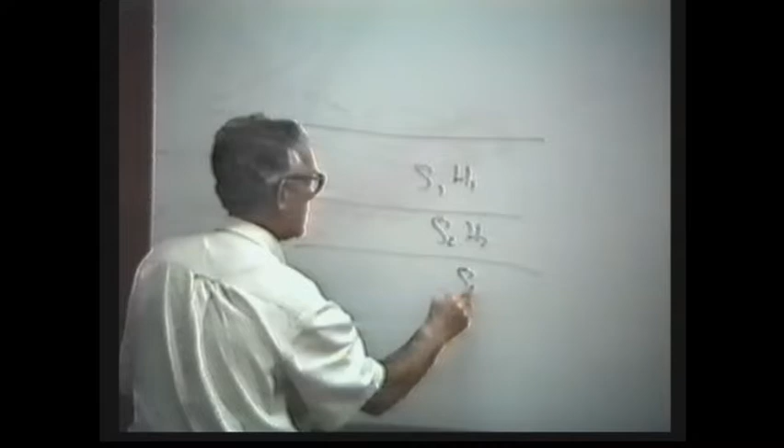Couple more comments. When we perform soundings, rho 1, H1, rho 2, H2, rho 3, there is inhomogeneity,

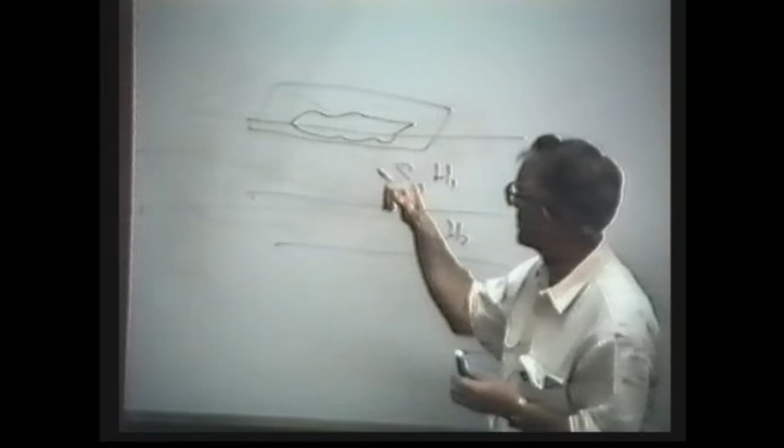At early stage, this inhomogeneity has influence, no doubt, it distorts the apparent resistivity curve, no doubt. However, with increasing time, due to the fact that it's a diffusion process, there are no currents here, so starting from a certain moment, the influence of the upper section disappears.

If you remember, we discussed it: if we have a two-layer medium, rho 1, rho 2, there is a moment when the upper layer becomes transparent. What does it mean transparent? The influence of induced currents becomes very, very small. So it doesn't matter if it's a uniform layer or not uniform layer, the results remain, unlike other methods, the same.

So the influence of near-surface geological noise decreases with increase of time. It's used also. Now, that's the second comment.

I think this is the last comment about time domain, and then I will go to a completely different, we'll start to discuss a completely different subject. Oh no, two more comments, I look at the table, two more comments.

Let us take a typical model in mining prospecting: a conductor and overburden, and a high resistive host rock. It's not necessary, but let us do this case. We perform measurements.

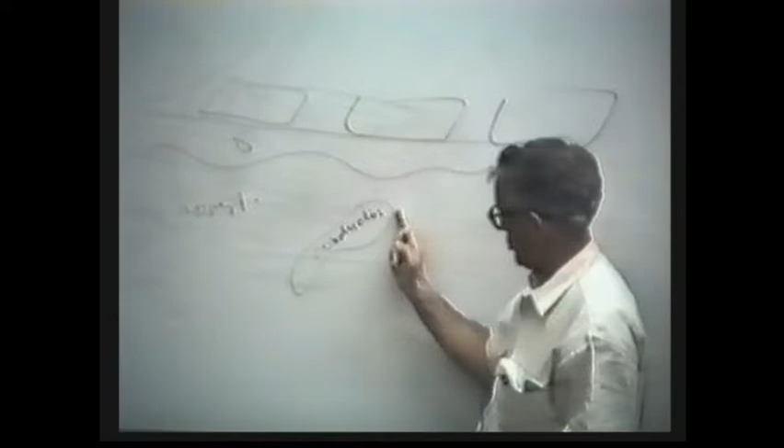What do we measure? We measure the effect due to overburden, and we measure the effect due to conductor. Our goal is to approach the late stage when the conductor manifests itself in the best way.

Also, with exponential decay, we can define a time constant. In most practical cases, not always, at that moment the field due to overburden also corresponds to late stage. So we don't know the conductance, we don't know the overburden, we don't know its thickness, we don't know how it changes.

It's a source of noise. But what we do know, often, not always, is that the field which we measure, or electromotive force, is some effect due to our body plus effect due to noise, due to overburden. Again, we don't know conductance, thickness, or conductivity, but we know we are approaching the late stage. Therefore there is some coefficient A which depends on conductance and on geometry, divided by T cubed.

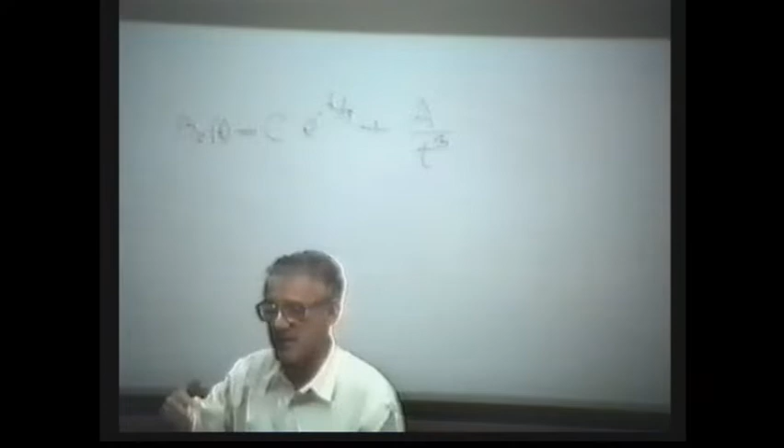That's what we do know. We know, regardless of what is the thickness or conductivity, as soon as it's late stage, the field must decay in this way.

I saw reasonably many examples in Russia, where performing measurements at two times. Let us take these measurements at time T1 and sometimes T2. It's equal to C, E minus T2 over tau, plus A over T2 cubed.

Let us take another measurement. We have them when we measure transient response. Again, we don't know this coefficient. It's noise. But we know how it behaves with time in most cases.

So if you multiply this term by T2 cubed, T1 cubed, it takes the difference, not difference of values of the field, but before, please multiply this coefficient. What would happen here? A difference between T2 cubed...

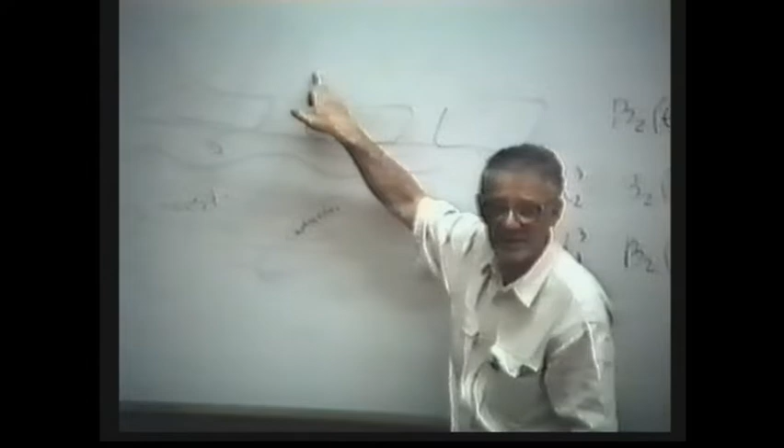Often we have, again, a function we don't know. It's unknown, it changes from point to point. Here, one value A, another value B. But what is important is that we do know the dependence on time. It's not constant, it's a function of the point of observation. It depends on the size of the loop. It depends on many, many factors.

But there is one important factor: regardless of what the overburden is, there is always a moment when the field, the magnetic field derivative, will decay in this way. So combining our information about the behavior of the field due to conductor and layered medium, we can subtract, we can reduce, sometimes even greatly reduce, noise. So that's one of the ways of working with this data in order to remove noise.

That's one example. It's natural if there is no overburden, but there is host rock. Simply, we also know, suppose no overburden, but there is a finite resistivity of host rock. Then you will know the field is equal to, again, some unknown useful signal, plus, again, an unknown different constant, not the same, only the letter the same, T to the power of 3 over 2.

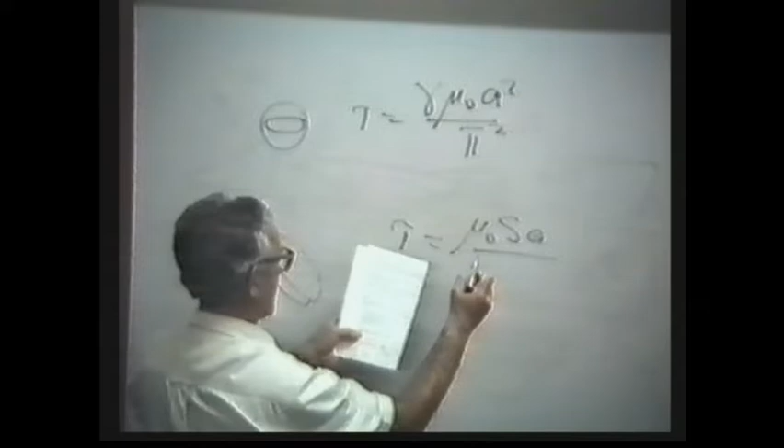Then let me show you what happens with a disk. Sometimes we can replace our body by a metric thin disk. If its conductance is S, meaning thickness times conductivity, then the time constant equals mu naught times S times A, divided by 5.5. What is A? The radius.

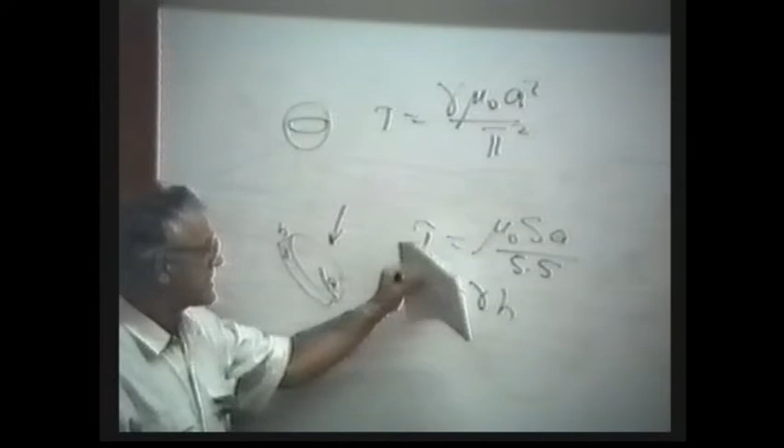Conductance is S gamma times thickness. So the time constant is governed by conductance and the radius, or size, in the direction perpendicular to the field. Why do I say perpendicular to the field? This time constant is independent of how the field is directed. But mentally, your primary field can be presented as a field along the disk and perpendicular to it.

If you consider the field along the disk, since it's very thin, it does not practically create any induced currents. So you can say the time constant equals mu naught S A divided by 5.5. Let me give you another example.

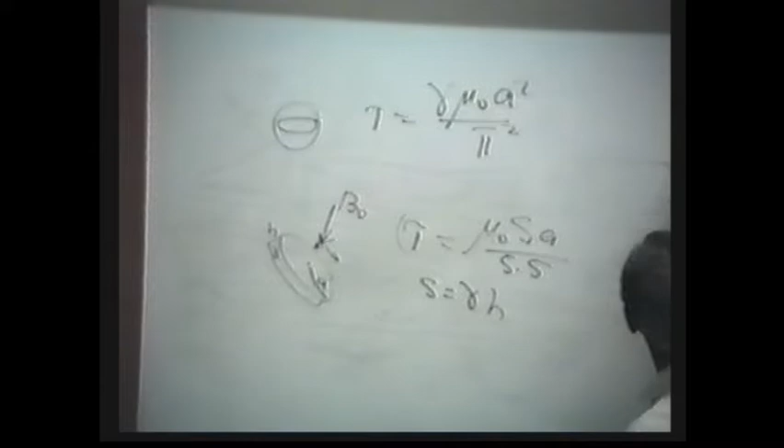Suppose we have a cylinder, a very long cylinder. It doesn't matter how the field is directed, the constant equals mu naught gamma A squared divided by, let's say 6, more precisely 5.78, but 6. Now you see how everything was 10, 6, 6. So there is no strong change. We only have to know which parameters define it.

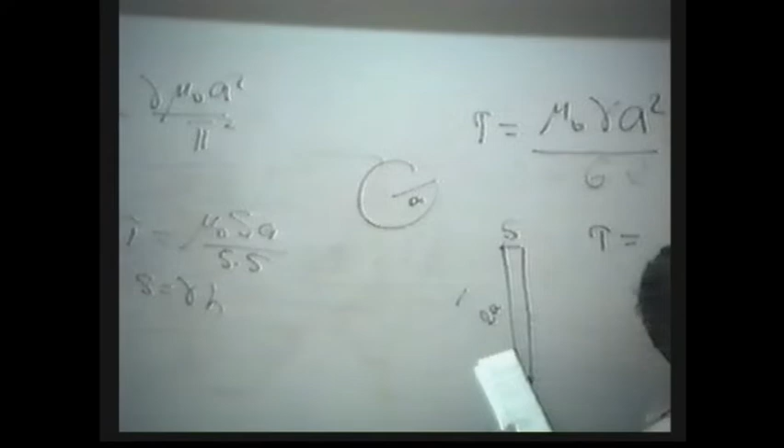Let me give you another example: a plate. Conductance S, again thickness times conductivity, very very long. Now that's 2A. The conductance, divided by 4, when thickness H is much smaller than this dimension.

Now let us look at another example. Suppose I have a thin plate, but the cross-section changes to an elliptical cross-section. That's B, that's A.

Suppose the field has an arbitrary direction, but not along the axis. So there is always a component of magnetic field in the perpendicular direction. Then the time constant equals mu naught S A divided by 5.5.

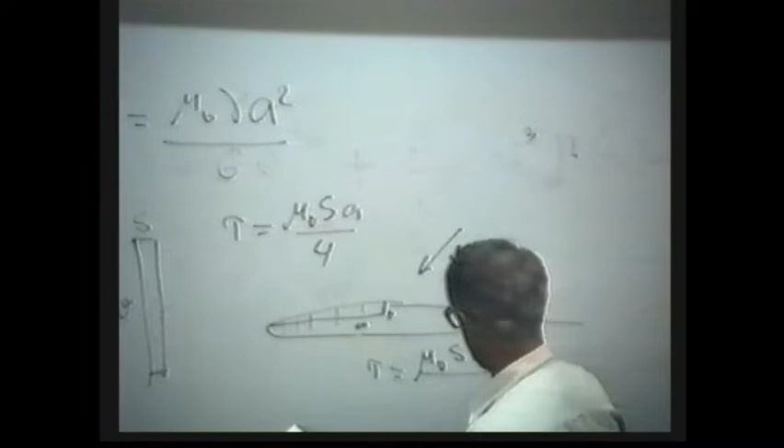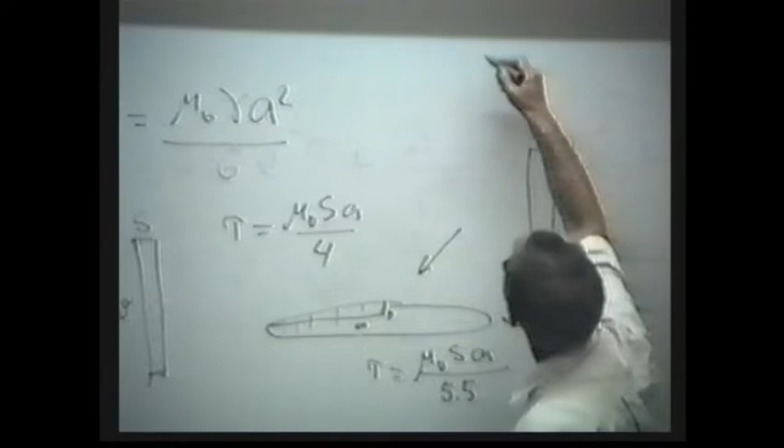Now suppose a very unpleasant case: our elliptical cylinder is vertical and our primary field is down. Let us assume we created the field this way. Our loop is located above a vertical dike, at the dike. What do you think happens in this case with the time constant?

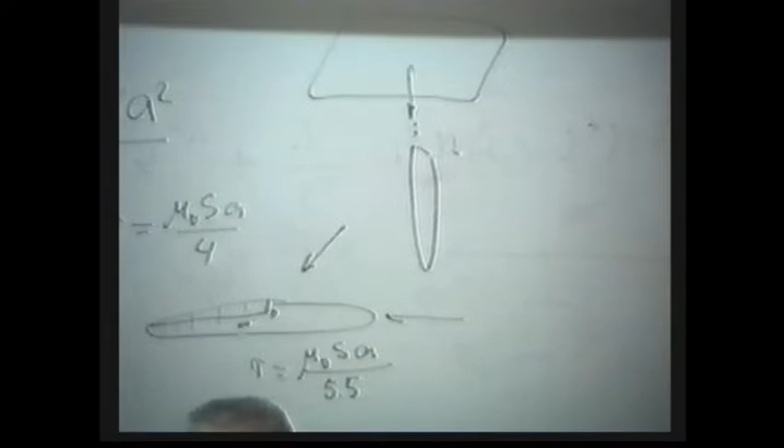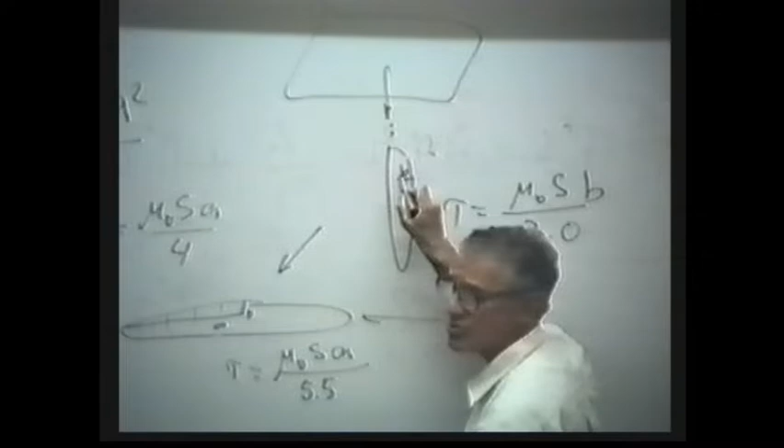Will it be large or small? Very small, very small. The time constant is then equal to mu naught S B divided by 3, where B is half the thickness. So two troubles instantly: trouble number one, the field is going in this direction and the cross-section is small. We do have induced currents, but they are small. Moreover, the time constant is extremely small, so decay would happen quickly.

In general, the time constant is independent of how the body is oriented, but that's an extreme case when the field is exactly along the major axis. Now let me take another conductor, and I will fill in this part. It will be done.

Suppose we have a spheroid with axis B, axis A, and conductivity gamma. What happens to the time constant when the ratio between A and B changes?

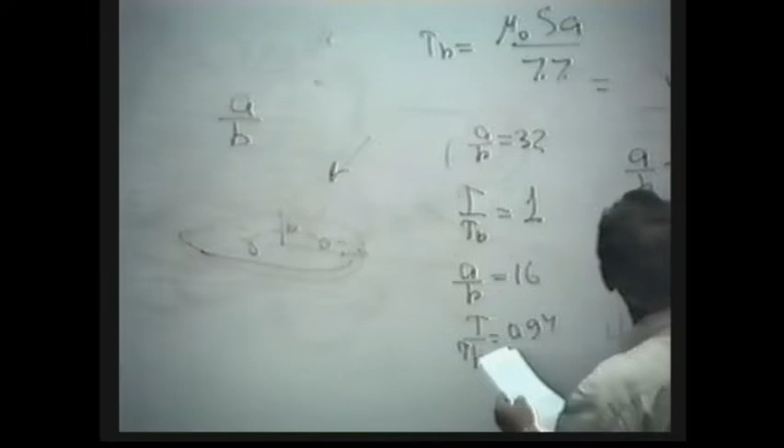Now if we take A over B at 8 meters to 1 meter, then tau over tau B is around 0.884. So again, a small difference. All these spheroids behave as if you had a very thin body.

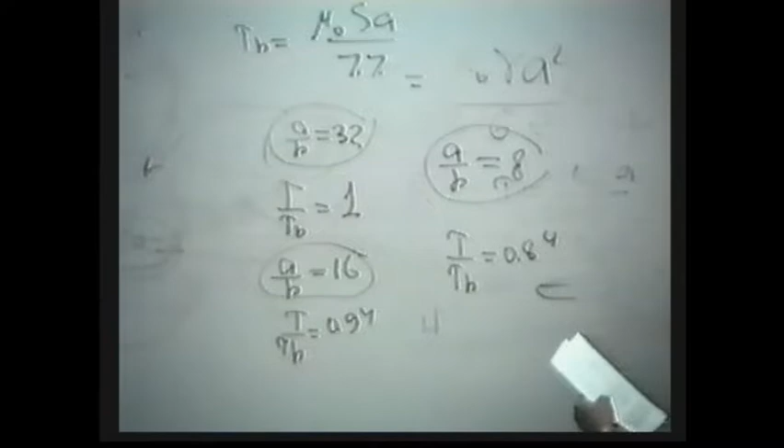Now let us take the ratio A over B as 4. Again, tau over tau B equals 0.7 — not a great difference. And finally, when you take A over B as 2, it becomes tau over tau B equal to 0.56, only a 2 times decrease, so it's a very stable parameter.

Now I've given you a thin conducting plate of finite dimension, so let me stop here. That's the general picture — that's all about time domain, taking into account what was told before.

Now let me discuss with you a completely different subject. It has a straightforward relation to the relation between geological noise and useful signal.

As I told you, I am looking at the past, at the process of improvement of electrical methods. So up to the 1950s, there was only the electrical method for soundings, for mining prospecting, not in conditions like the Canadian shelf or Scandinavian, but in environments where we have overburden and host rock.

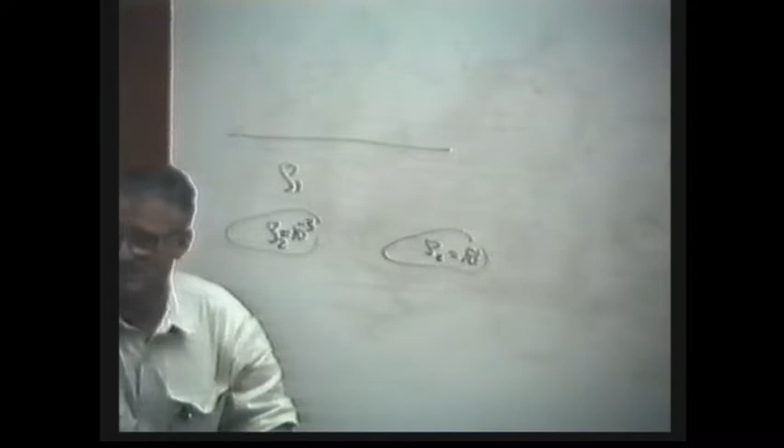There were two known facts about electrical methods. Fact number one: if I have two conductors that greatly differ by resistivity, the anomalies are practically the same. So if rho 1 is 100 ohm-meters and rho 2 is 10, the anomaly is almost the same. So, poor resolution.

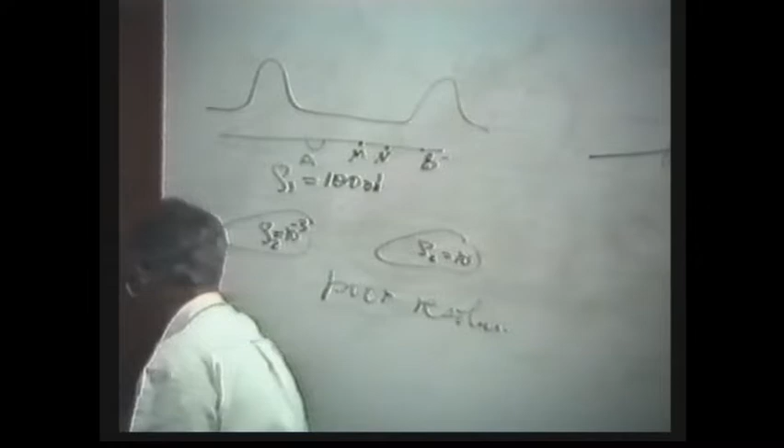Then there was a second fact, which I haven't mentioned yet. There is almost an iron rule, almost, when you use different profiling systems, not electromagnetic, but A, M, N, and B electrode arrays.

If we have a conducting overburden with thickness H, and we have an ore body like a dike with thickness h small, and we use our array AMNB, then the rule of thumb is: regardless of the conductivity of the dike, and regardless of the conductivity of the overburden, as soon as it's less than the resistivity of the host rock, you cannot detect your conductor if the overburden thickness is more than 4 to 6 times the thickness of this dike. So it's a very serious limitation, extremely serious.

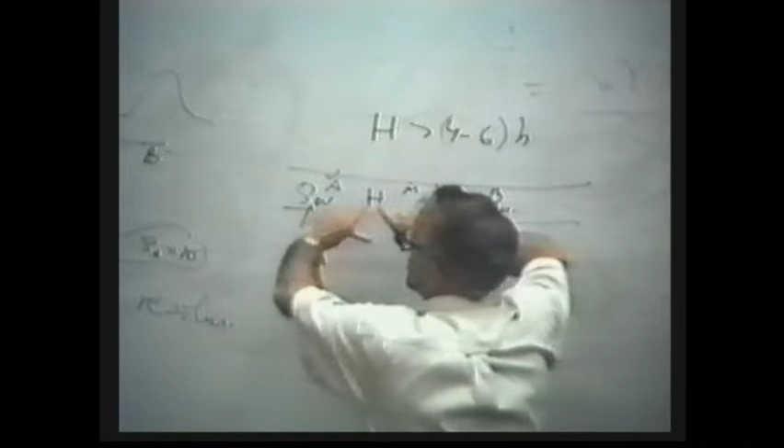You can make your separation AB as far as you would like, it's no use. For instance, you can use a dipole system: AB here, MN here, generator here, and you measure voltage. It's also a profile system. You can fix the position of AB and move MN, but it will not help.

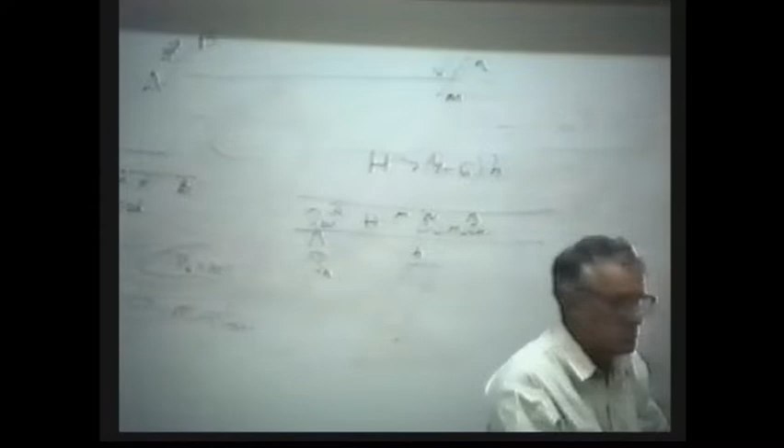Why? First of all, solution of the forward problem and experience both show this. What is important is: yes, if you make a large separation, you can create currents here, no doubt, there will be currents, charges, electrical arrays. But if there is an overburden, these charges induce other charges at the interfaces, and they usually screen the effect. So if you have a dike with thickness only 3-4 meters at depth 20 meters, don't expect to see it, regardless of how huge your separation is.

So these two facts were known. Then when inductive methods began to be used in a conducting environment — non-conducting environments were used before the Second War — Sweden developed excellent Slingram systems, as did the Canadians. So there was a lot of equipment, but in the West there was no experience in conducting environments. There were sufficient places for working in resistive, very favorable conditions.

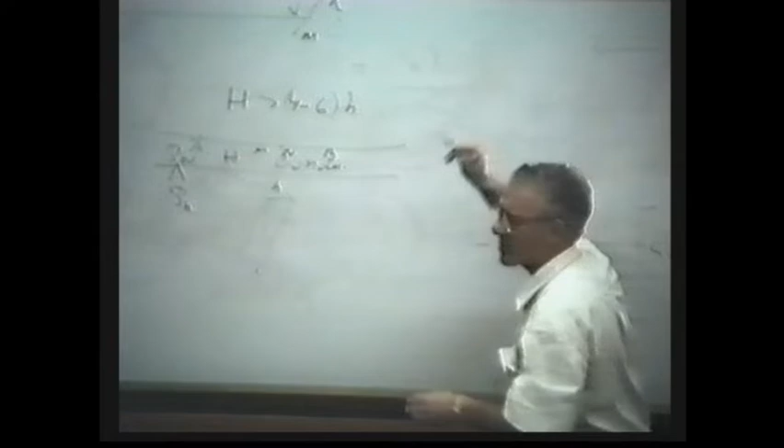But when attempts were made to use inductive methods, loop methods for instance, in a conducting medium, it turned out it's possible to detect deeper, unlike electrical methods. So it was a very good period of time. First of all, if you remember, measuring the quadrature component at the low frequency part of the spectrum.

What is the ratio between tau noise and tau ore body? If you are working at the low frequency part of the spectrum, your magnetic field is proportional to tau, so you have better resolution. If you are working measuring the in-phase component, the ratio is even better. So it was an excellent, short but excellent period — I would call it the optimistic period of inductive methods.

I remember the time, I remember the papers, I remember many other things, and finally we developed a method which has higher resolution than DC methods. So it was the driving force in developing inductive methods. I'm talking only about frequency domain now, then time domain.

But evil didn't sleep. And we didn't notice that sometimes, in spite of the fact that there was no more grounded line, there is still a different source of fields which is much less related to the conductivity of our body than we expected. That's what I'm going to discuss with you — what I mentioned, Duncan mentioned, and then I will discuss this subject in more detail. So let us do the following.

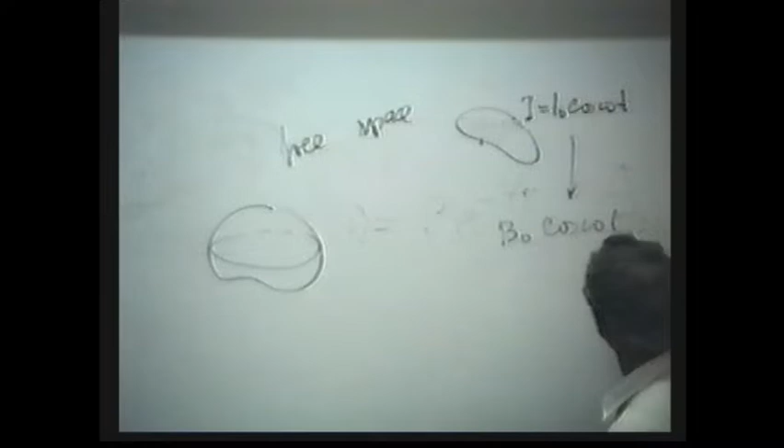We have conductor, free space, and our loop. Our current changes as I cosine omega t. This current creates what? Primary magnetic field, cosine omega t. This magnetic field creates what? Primary electrical field. That's the main role in frequency domain, and in time domain during ramp time, it creates primary electrical field.

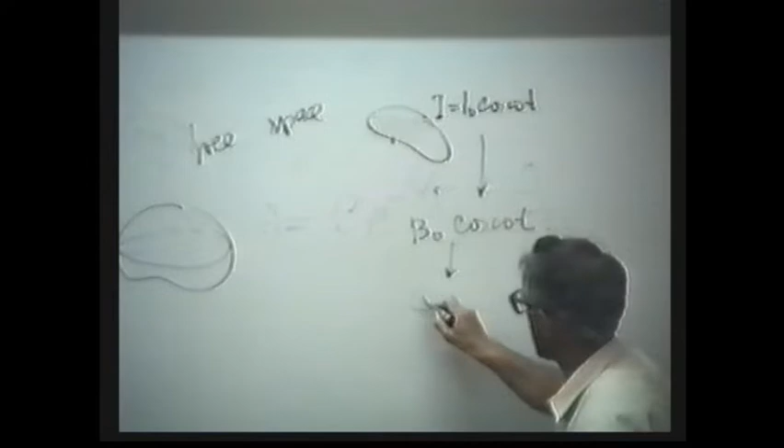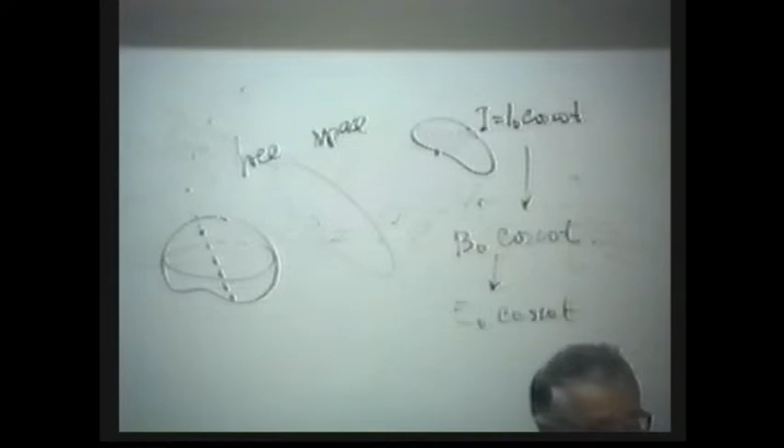So we have primary electrical field, for example, some current loops. Now we have conductor. Here there is a primary electrical field, here, here, here, here, here, etc. When we have primary electrical field, what would happen? Current arises. Charges start to move, under action of primary electrical field. So this ion or electron starts to move, and then it reaches what? Surface, because primary electrical field is going through the surface.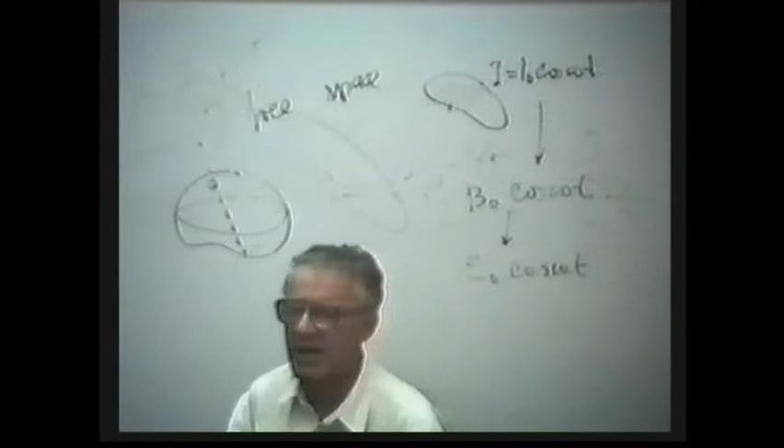Tell me please, will this charge go into air or not? No way. What happens with this charge? It starts to move along, it changes direction. Currents can only move inside of conductor. So something must stop these charges. They are not clever. They can only stop if there is a reason, a cause, to create electrical field in opposite direction. Then they will not move, they will go around. And this reason is surface charges.

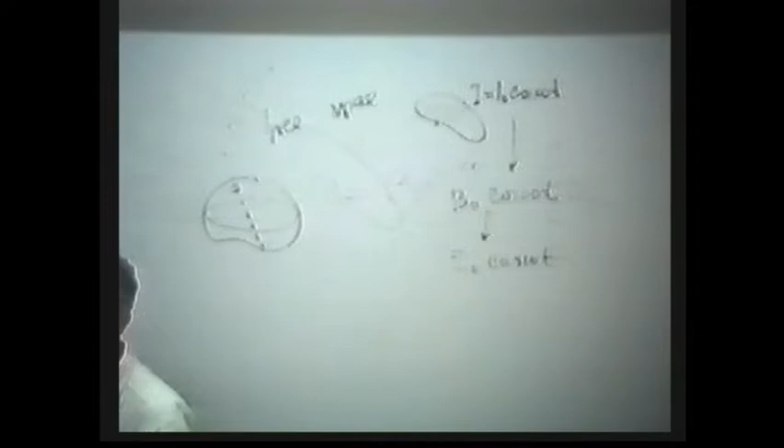Well, they arise, they have one function. They create such electrical field that your induced currents stay only inside. They cannot move outside. That's the physics of our effect. Time domain, frequency domain, doesn't matter. Now, when you have free space, these charges only affect the geometry of induced currents, and we don't feel them. Why? Because these charges don't create current outside.

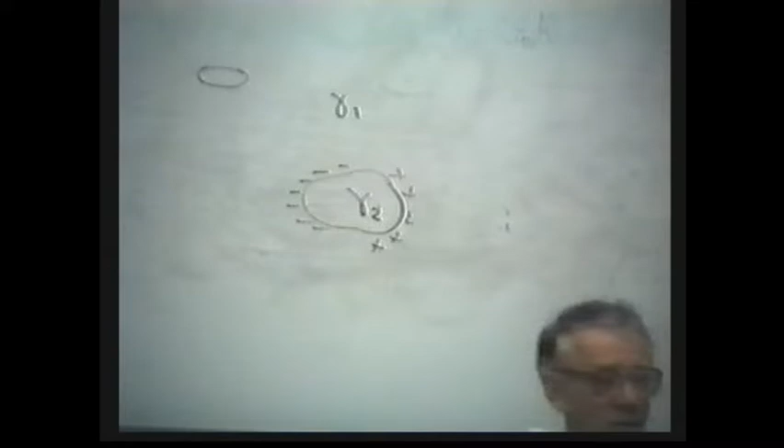So when it was realized that electrical charges arise on the surface, that was a shock, because we wanted to introduce inductive mining prospecting. It was hoped there would be no charges, no weak or poor resolution, that everything would be much better. It was really a shock.

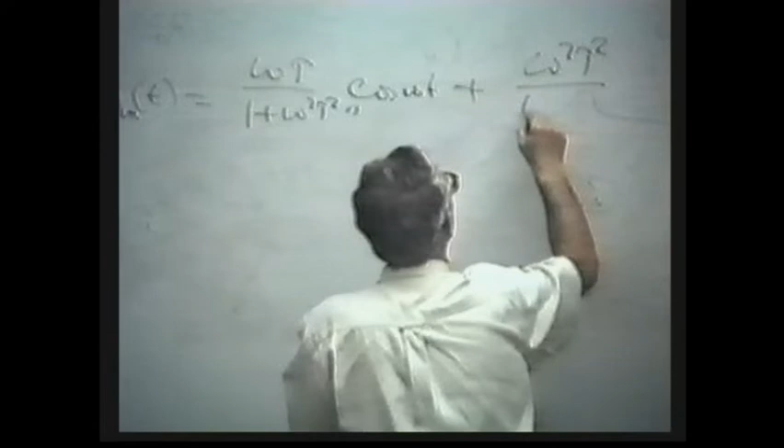Now, since charges arise, therefore, two current patterns. One current arises inside of conductor. And behavior of this current is described by the known function omega tau. Just so you know, we don't use complex numbers here. So behavior of the currents inside is equal to some expression: omega tau over unit plus omega square tau square, cosine omega t, plus omega square tau square over unit plus omega square tau square, sine omega t. That expression describes induced current inside of conductor.

They depend only on time constant, and therefore magnetic field caused by these currents also depends on time constant. That's the best part of the electromagnetic field. That was what we wanted.

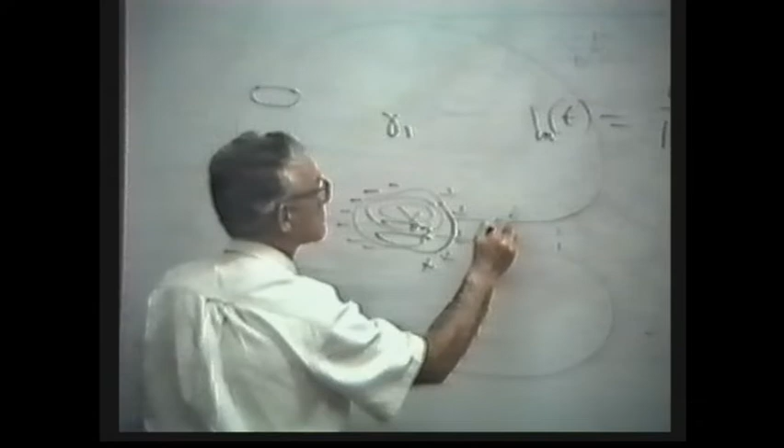However, there are currents, there are charges which arise at the interface. There is conducting medium. Instantly, electrical field causes current through conducting medium. And it turns out there are cases when this current does not depend on conductivity of the body at all. There are cases when it does.

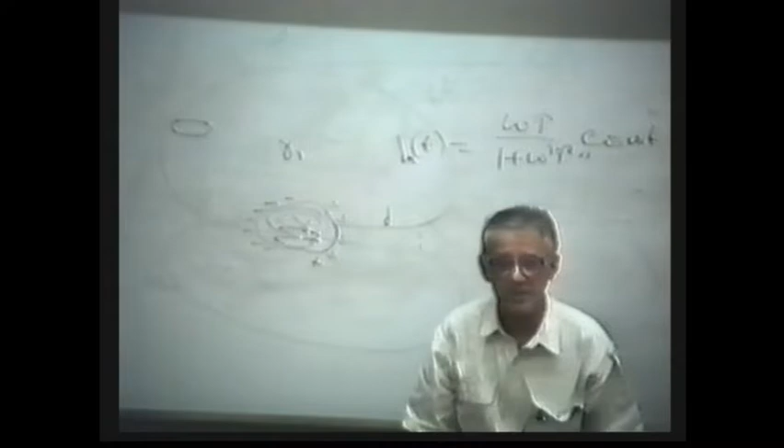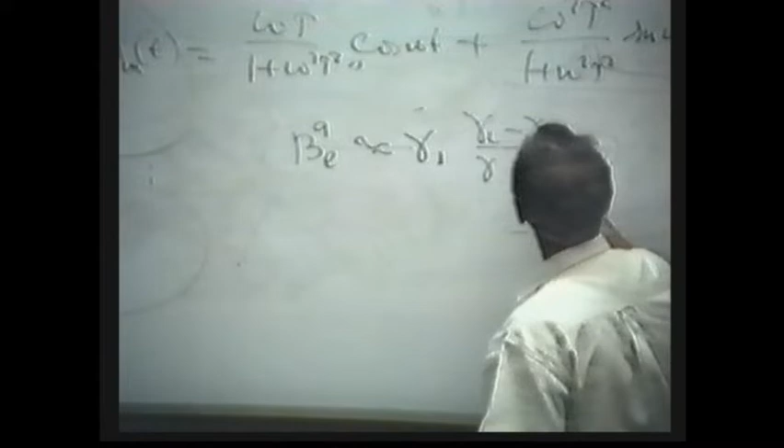Now, what is written here? This coefficient is practically independent of the conductivity of our body, because this coefficient, it's easy to see, if ratio of large, then it's almost 1. What is it? Conductivity of formation. So this part of the field is practically the same over poor conductor and good conductor.

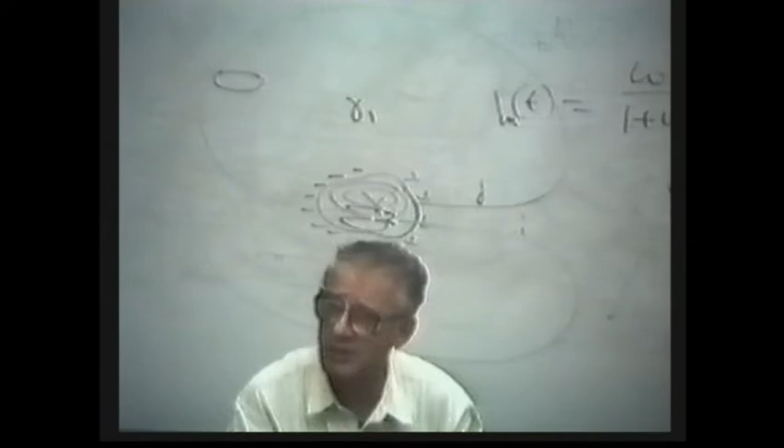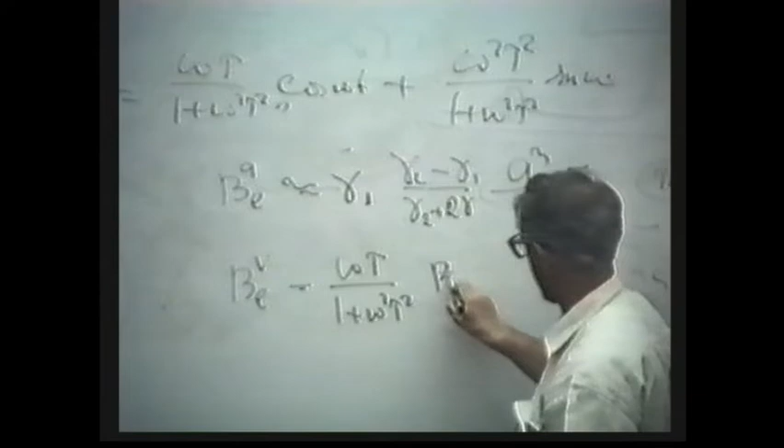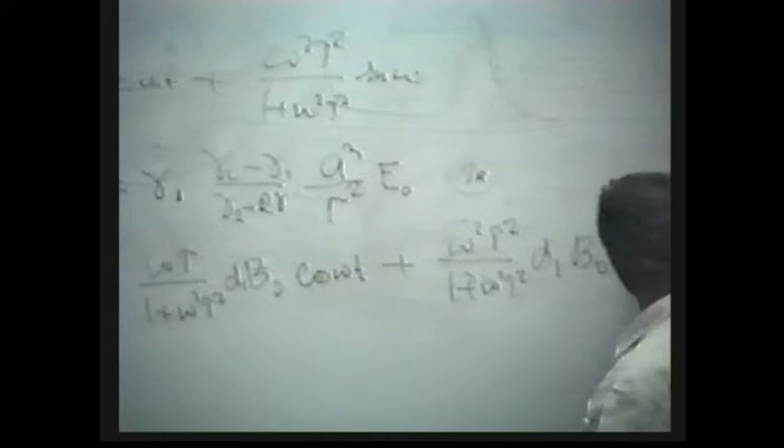So we return back to our past. Of course there is another part of the field, the vortex part, caused by these currents. Here the situation is better. It's proportional, for example, to the quadrature component of the currents: primary magnetic field, cosine omega t, some coefficient d that depends on geometry, d1, omega squared tau squared over unit plus omega squared tau squared, d1 again primary sinus omega t. So we thought we had only these two terms when inductive methods were developed.

This part of the secondary field is caused only by induced currents inside. This other part of the field is caused by currents going through the surrounding medium and back. They are present due to these charges. So we have two fields: B equals B vortex plus B galvanic. Now, if this is not clear, please ask me.

Now, if you don't want to ask me, or feel uncomfortable, let me ask you a question. When is this part of the field absent? Free space, one situation. What else?

Yes, very good. So, for instance, if we create a symmetrical body, a loop, and the primary electrical field is tangential, there is no such field. So the loop is, speaking strictly, a very good generator, because it tries at least to be tangential to the body, or it creates positive and negative charges, and they cancel each other - not completely, but to a good extent. So each time you create it, you still do create charges, no doubt, there is still a galvanic part of it.

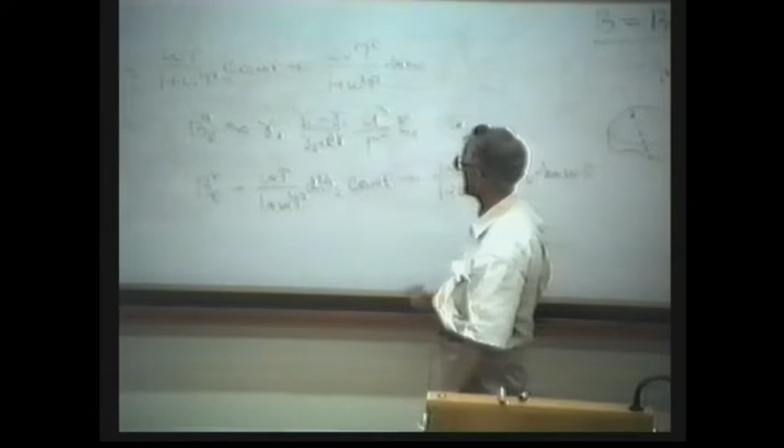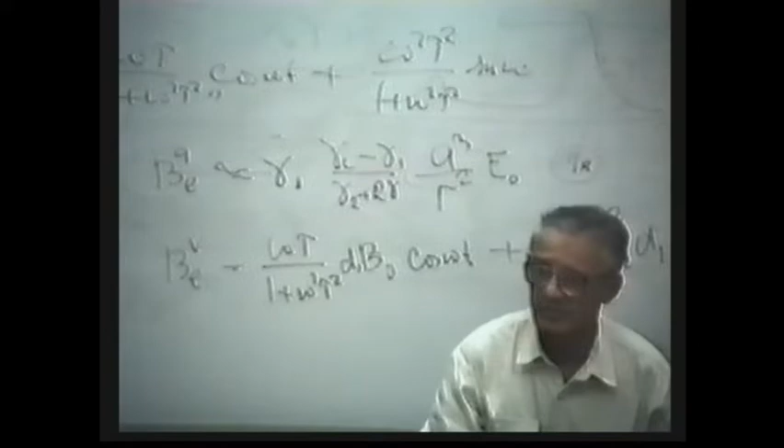Also it's clear that with increasing resistivity, decreasing conductivity of the surrounding medium, the density of these charges becomes smaller. But when the medium is more conductive, we are in trouble. We are in deep, deep trouble.

So we have three fields: one in phase, if quadrature, if current changes as sinus omega - here quadrature if current changes as sinus omega t, for example - that's the in-phase component plus this component of the field. Everything when I'm speaking in terms of frequencies is transformed into the time domain.

Now, when it was realized, it was an unpleasant shock. Very unpleasant shock. I remember this time very, very, very well. Also, as soon as it was realized, that was the beginning of big concern in magnetotelluric methods. And finally, this fact brought about the collapse of the magnetotelluric exploration method. Only this fact, only.

I will come to this point. So, if you understand physics, let us ask ourselves: when is this part small, when is it large? Partly we have answered this question. When the medium is resistive, we can expect this part of the field is small.

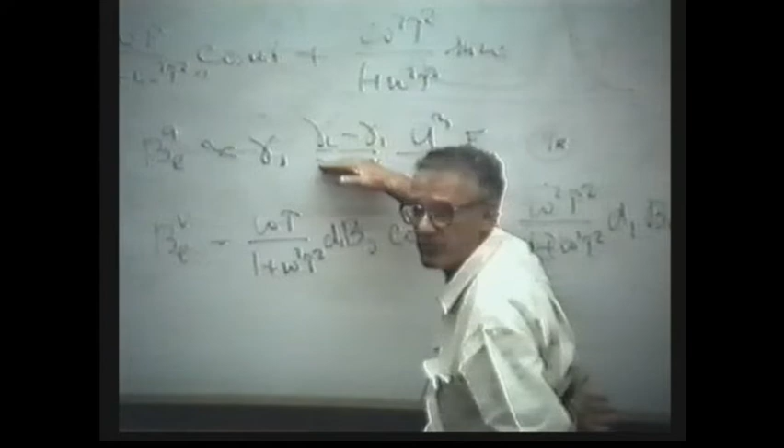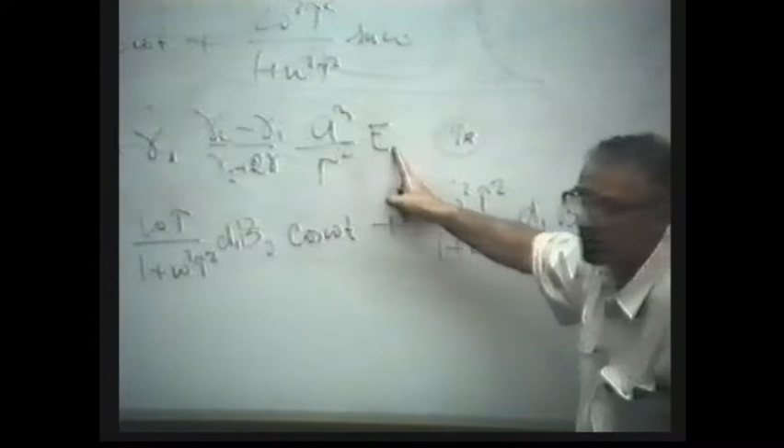Now, what else? Primary field. Here, the vortex part of the magnetic field is related and proportional to the primary magnetic field's rate of change with time. Here, proportional to the primary electrical field. At different methods, there is a completely different relationship between primary electrical field and primary magnetic field. Let me give you 3 examples. If we have a loop, a dipole, if you remember - dipole.

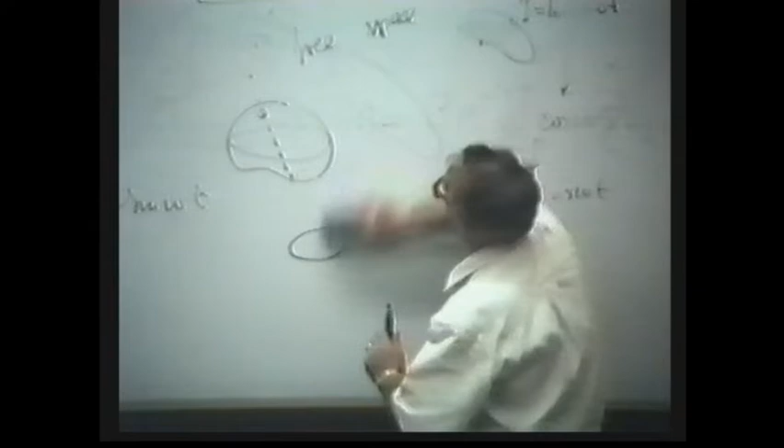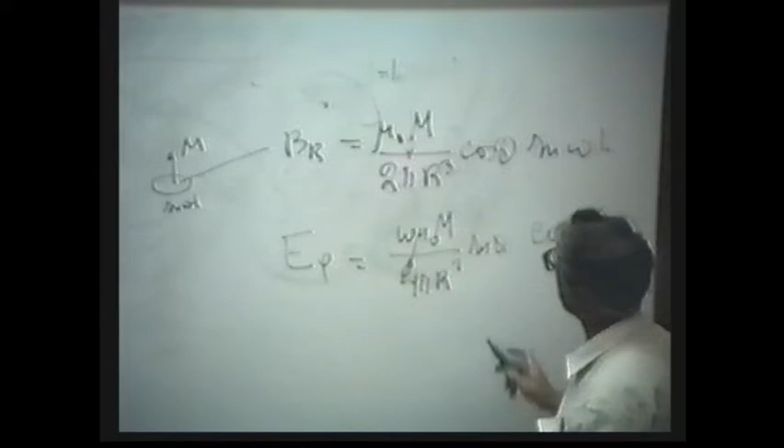If you remember, I wrote the expression for a magnetic dipole. BR, the primary field, the R component of the primary field, equals mu naught M over 2 pi R cubed, cosine theta. And if current changes as sinus omega t, I have to write sinus omega t. What about the electrical field? That's the primary electrical field - that's the field here. What is it? It's equal to I omega, we don't need I, omega mu M naught over 4 pi R squared, sinus theta, cosine omega t. So let us compare these two expressions.

Electrical field is proportional to frequency. The lower the frequency, the smaller this field. So at low frequency methods, usually this part is small. Why? Because we are using our loop and the electrical field arises inductively as a rate of change. Low frequency, low rate of change, low inductive part of the field.

Again, I don't describe it here, but in my book there is a chapter - well, it's called the galvanic part. I was young, as you are. I published 3 papers by chance in '61, '62. They were called Influence of Surrounding Medium Near the Source. The second part was called Influence of Surrounding Medium Far Away. And the third paper was called Three Methods of Excitation of the Field in Inductive Mining Prospecting.

And it turned out, I didn't expect it, because I discovered this unpleasant effect, and it turned out to be the beginning of, for example, the disaster of MT. If you read sometimes about MT, you will find reference to this paper. So it was nothing from a mathematical point of view - I took very well-known solutions done by great masters of theory, Sommerfeld diffraction on the sphere, who knows. But I only took parameters which corresponded to our geological conditions. I got all these simple formulas. The formulas were not what interested me, but it was important to see these bad charges.

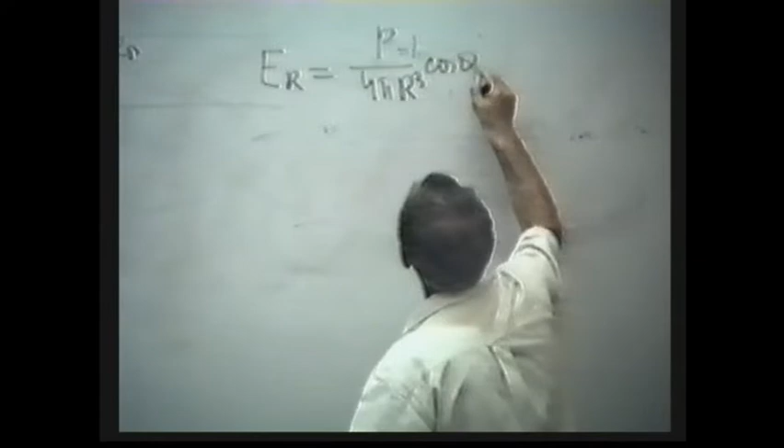First of all, what creates the electrical field in this case? Charges which arise if we take a uniform half space. That's A and B. We have charge at A and at B, plus and minus. Using the direct current formula, we can write the electrical field, for example, ER equals some moment divided by 4 pi r cubed, cosine theta, cosine omega t.

And the same for E theta. What is essential here? Previously, the primary electrical field was proportional to frequency, so decreasing frequency decreased the effect because it was an inductive electrical field. Here, the magnitude is independent of frequency. It's a constant.

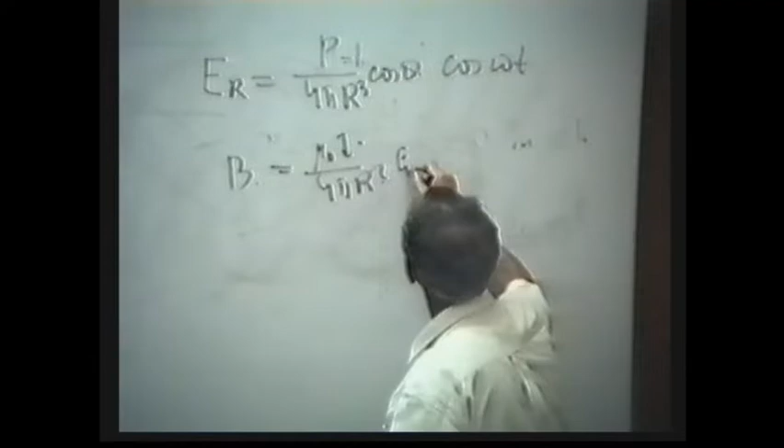It means that measuring the magnetic field caused by grounded excitation, the galvanic part of the field prevails. In essence, it means that we repeat everything done in the DC method. It's not too bad. It's not good, it's not too bad, but sometimes it could be very good.

Let us clarify this general statement. We found out that electrical methods have extremely poor resolution. Poor. Good conductors and bad conductors create almost the same anomalies in geometry, the same. So we have to understand this fact: electrical methods can be extremely useful in mining prospecting if we perform mapping.

Don't pretend that we would like to distinguish anomalies by conductivity. We would like to map zones, for example, a zone where we have an increase of overburden, drastically, as Peter mentioned a few minutes ago, or the opposite. So the electrical method will map these structures reasonably well, could map them reasonably well. But we will not be able to say what the conductivity of this zone is.

However, as soon as we use a grounded line, due to the factor that this field is independent of frequency and the galvanic part of the field prevails, we have to forget about all time constants, determination of time constants, about the vortex effect, because usually, not always, but usually in most cases, it's relatively small. Now, that's the second step. Third step.

It's a simple matter to show the same story with the receiver. With the receiver, you have two choices: either measure the magnetic field or measure the electrical field.

If you don't have the galvanic part of the field, you don't have charges, it doesn't matter which you use. So in an ideal classical model, when there are no charges, only vortex currents, the result is the same. But as soon as you have a change of resistivity, charges arise here, or you simply have some zones of low resistivity, a confined zone of resistivity, the electrical field drastically emphasizes the galvanic effect.

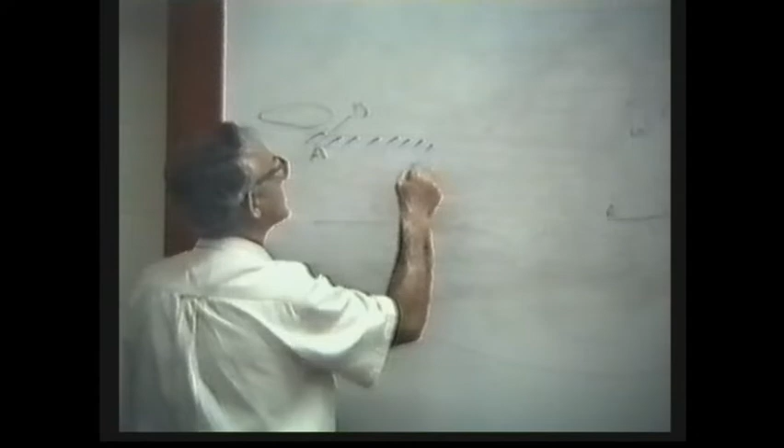So if the point of observation R is such that R distance is greater than 2 pi delta, or greater than wavelength, then we are working with the so-called wave zone. I mentioned it, Duncan mentioned it. So energy goes in this way as a plane wave.

Plane wave. In this case, there is a peculiar relationship between electrical and magnetic field, regardless of what is generated. It could be a vertical line, as VLF in a radio station for VLF. It could be ionospheric sources. It could be a grounded line in controlled source MT or any other method. It could be a loop, doesn't matter. Horizontal loop, horizontal line, vertical antenna, doesn't matter at all. Iron rod.

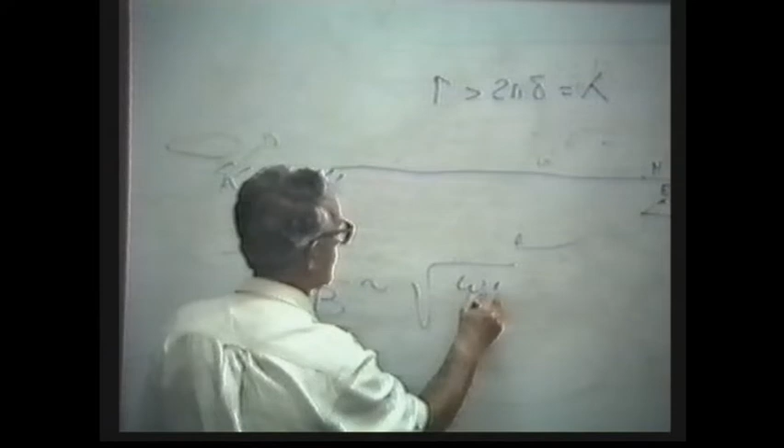In this case, in the ground there are two components of the field, electrical and magnetic. And the ratio between them is a proportional coefficient, which is square root of omega mu rho. It's impedance.

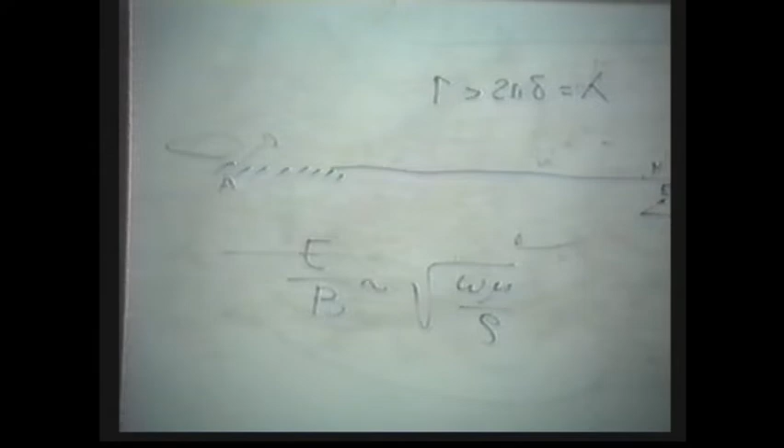That's impedance in a uniform half space. So the electrical field, which creates charges, is proportional to resistivity, square root of resistivity, omega mu over conductivity, inverse proportional to conductivity, times magnetic field. This is the relationship between primary electrical and magnetic field.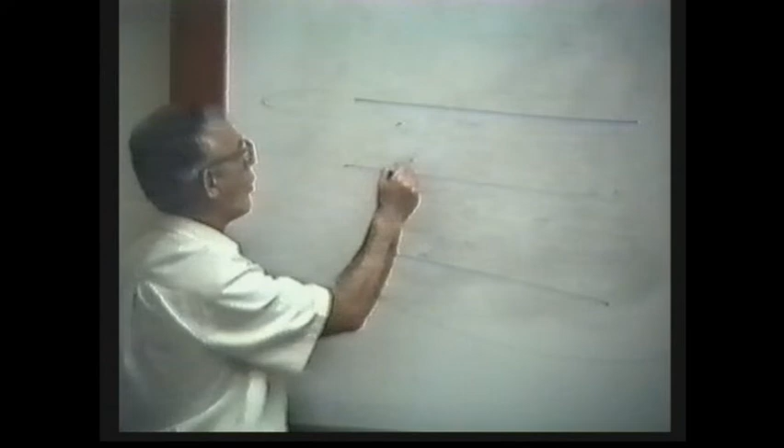Example number one: I have a 3-layer medium. Please remember, it's not exploration, so the model could be unusual for you. So rho 1, H1, then an extremely resistive, almost infinitely resistive layer, and then a very, very good conductor. You can understand the purpose of this resistor.

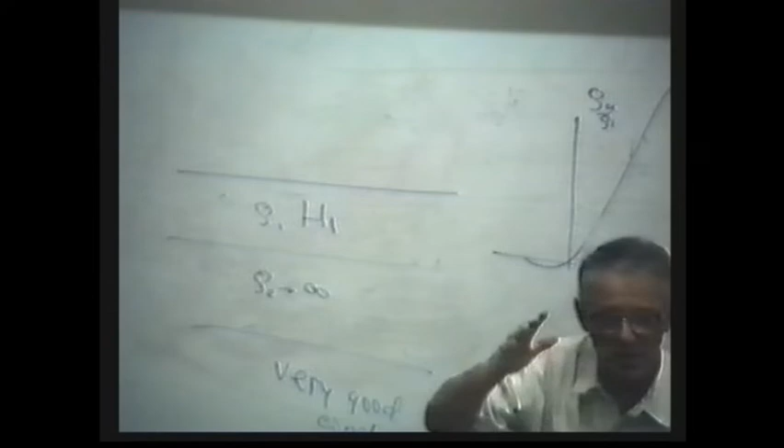As a function of wavelength, at high frequencies and low frequencies, apparent resistivity over rho 1 has the following form: at high frequencies we get rho 1. Then in zone S, resistivity increases. Then, when the wavelength becomes such that skin depth becomes very, very great, we start to feel the good conductor.

I tried my best to tell you, but I didn't tell you everything. I should stay a little longer. So this is zone S. What does zone S mean? It gives you the conductance S of the first layer, S1, H1 over rho 1. Clear? At least believe me.

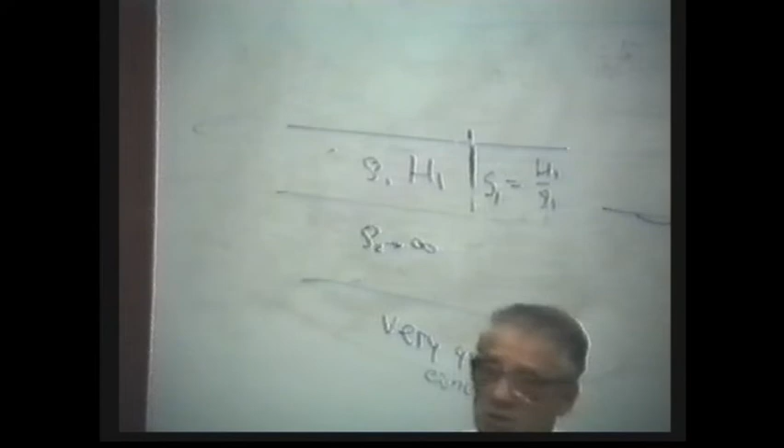Please believe. But it's possible to grasp this fact. Why? Because there is a range of frequencies when currents are uniformly distributed in this layer, and this layer, which could be a few kilometers thick, behaves as a foil, as an infinitely thin sheet. The same thing happens in time domain when we discuss overburden in TEM.

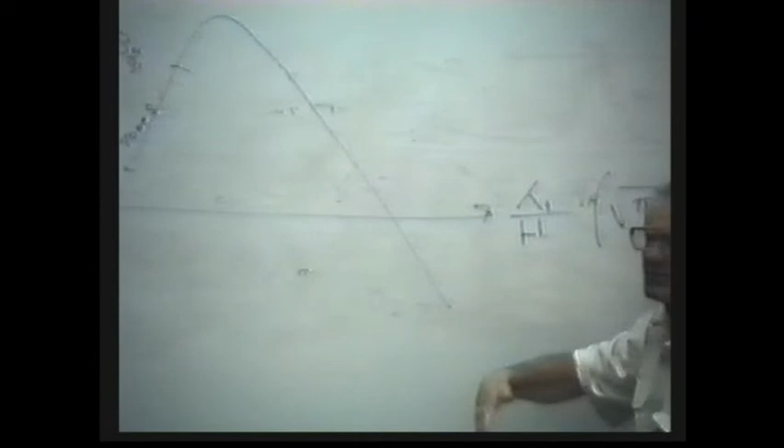Then there is a period, or frequency, as you wish. I made a point, not a mistake, but I would like to emphasize: instead of these unpleasant lambdas, please imagine the square root of period, the period of oscillation. Small period means high frequency, very large period means low frequency. So then there is a moment when we start to feel the very good conductor.

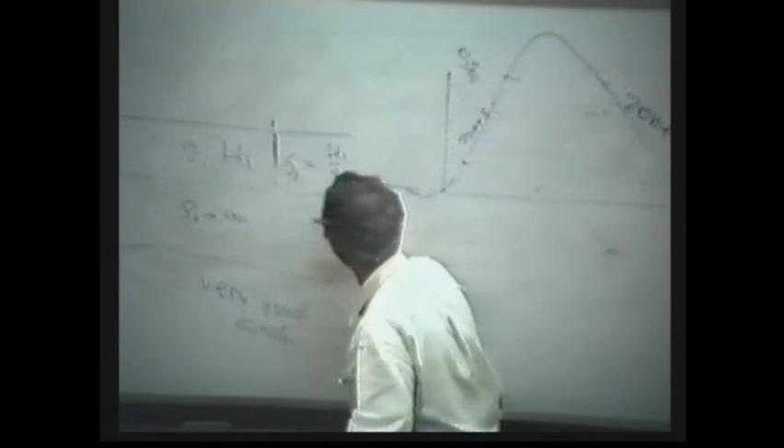The longer period, the stronger influence of the conductor. It turns out in log scale it's a straight line, and there's a beautiful feature of this part of the curve which was the main attractive force for using MT for deep soundings. It's called zone H, where H equals H1 plus H2. It's very useful—that's the main goal for this kind of MT model.

Why? Because if you have a very good conductor and you reach this part of the curve, you get the depth to the transition from high resistive to very good conductor. The theory is so simple that the ratio of electrical field over magnetic field, the impedance, simply equals omega mu H at this range. So you measure electrical field, measure magnetic field, take the ratio, divide by omega mu, and you get total thickness. Awfully attractive.

Now let us assume we have that ideal situation which we would like to have. However, there are sometimes—not sometimes, very often—lateral changes of resistivity. Suppose there is a host block with high resistivity, relatively resistive medium rho 0.

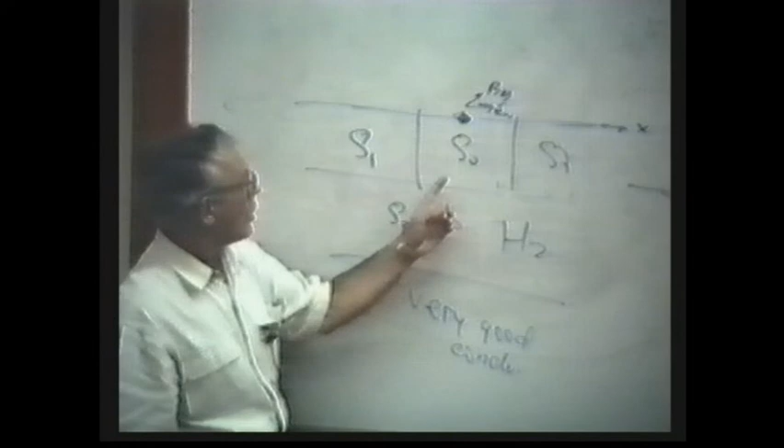Therefore, at the interface, surface electrical charges arise. If it's a more resistive medium, it's a positive charge; here, negative charge. This electrical charge is proportional to the electrical field—remember the expression, 2 epsilon naught, K1, 2, En average. Where exactly do we measure? At this area. So the electrical field due to these charges has this direction, from plus to minus.

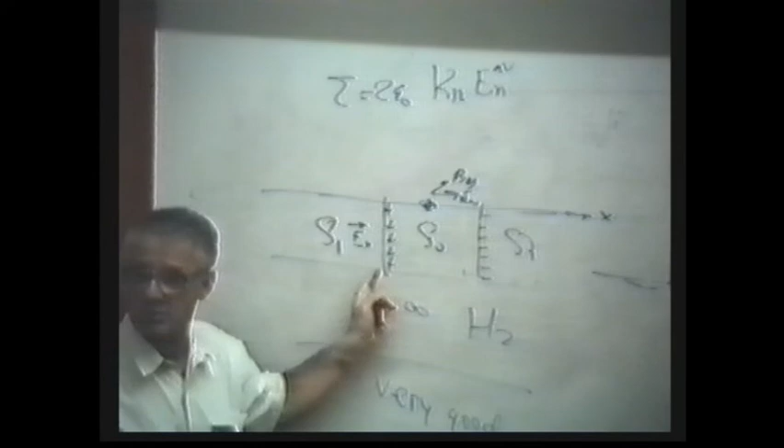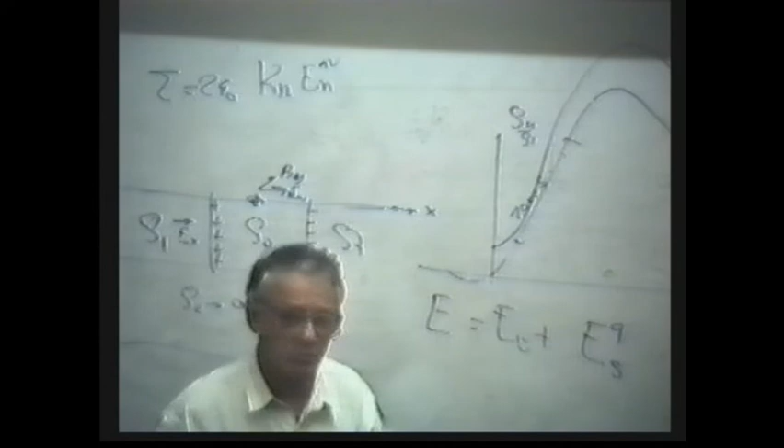So along with our plane wave, we will have a strong electrical field, and all our curves go up. Instead of the expected curve, we get this curve. It turns out this happens all the time, because regardless of period, you have an electrical field—you do have it, therefore you have charges all the time. You measure your electrical field, which equals E naught plus a secondary electrical field due to charges, galvanic. If this field decreases, the secondary decreases exactly the same way because charge is proportional to this field. So the apparent resistivity curve is shifted up, and it could shift 5 to 10 times up.

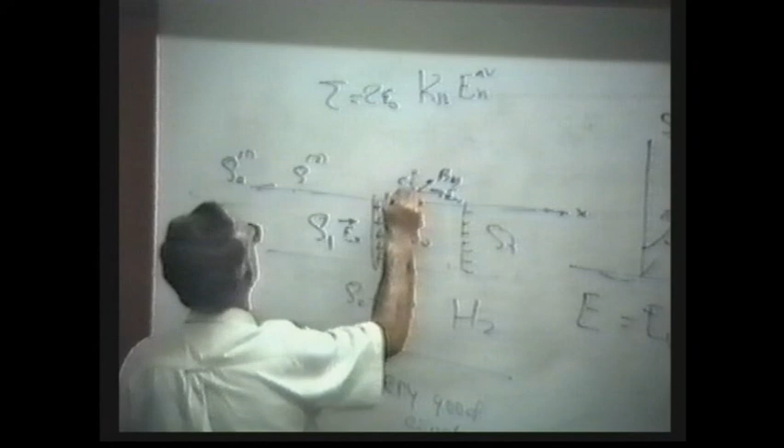So therefore zone H will give you a depth to the low boundary 10 times more than it actually is. Now imagine you measure apparent resistivity here—1, 2, 3. So when you are far away from this inhomogeneity, you get the same boundary, 5 kilometers.

So let me plot the profile. Suppose we are interested only in the low boundary—understandable, the low boundary. The same I can draw for the first boundary. So I have boundary, boundary, boundary at the same level, H1 plus H2. Now I interpret this point. What happens with depth? It goes down.

Again normal, so I have to interpret what is interesting. The shape of the curve remains almost the same—it's very nice, it's not distorted. It looks like a 3-layer apparent resistivity curve, and at great depth I got a syncline. But there's no syncline—the same flat interface. But what happens? Beneath our foot, there is an inhomogeneity. That's an effect called the static effect.

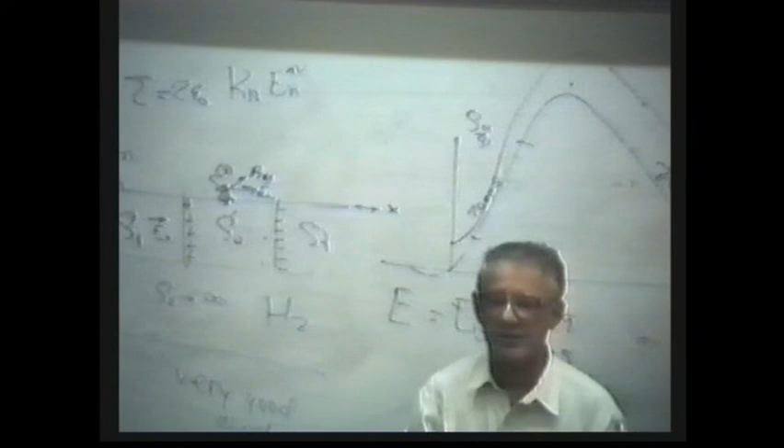In '82, I described this effect in detail in my book, Magnetotelluric Soundings. It's dangerous—that's an example of what happens in the magnetotelluric method when electrical field is perpendicular to the horst. We don't know where this inhomogeneity is. It could not be a horst; it could be, for instance, some small lateral change of resistivity.

For example, suppose there is volcanic cover, as at the Columbia Plateau in the United States, beneath sediments and basement. Volcanic cover is a very serious obstacle for using seismic, because many reflections and high noise occur—energy goes from top to the boundary, to the sediments, then back, and attenuates very slowly. So it's difficult to get a signal from the basement.

So in order to avoid this problem, magnetotelluric was used, but it turned out to be trouble too, because in volcanic cover there are many spots of low resistivity, for example clay or other surface formations. They create an extremely strong effect. In short, you have lateral changes at depths of only a few dozen meters, but it results in false anomalies appearing. You cannot do practically anything—it's simpler to say we are in trouble than to invent false anomalies. That's one of the main reasons why exploration refused to use magnetotelluric methods more.